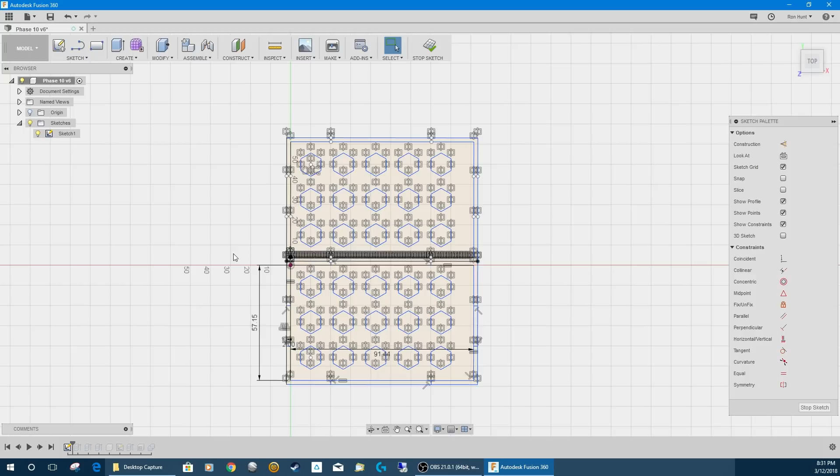For whatever reason, I think that was causing tons of issues, and everything gets going really slow. But anyways, we'll run through it real quick. I made the inner box here, and then after that I did an offset of 2 millimeters to give me the outer part of the box.

At that point I ended up putting little cuts in at 10 millimeters, I think, on either side, and that was going to be my edges that hold the cards. After that I ended up mirroring, using the mirror command on the sketch here.

I used, where is it, mirror. You can't see it because I don't have anything selected, but mirror, when you're in sketch, allowed me to basically copy or highlight all of this and mirror everything on this center line, and it just flipped it all the way over. So it was 100% tied directly to whatever the measurements did on this side.

After that all I did was add this shape in here, and then once I added it, I did a rectangular pattern and adjusted it so it looked nice. And then I just mirrored that all over to the other side.

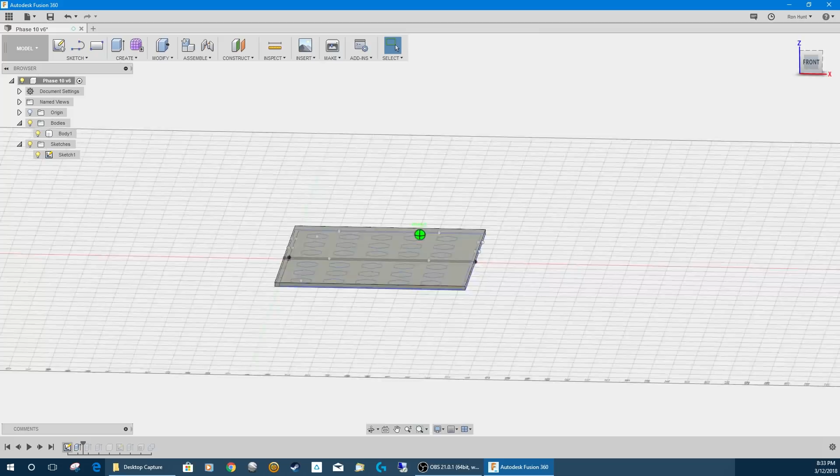At that point I came out of the sketch, and at that point I have my bodies. You can see the first thing I did was extrude the whole bottom up, 2 millimeters. Then the next thing I did was grab the edges, all those corner pieces, and extruded those up. Once I did that, I cut the holes and extruded those as cut.

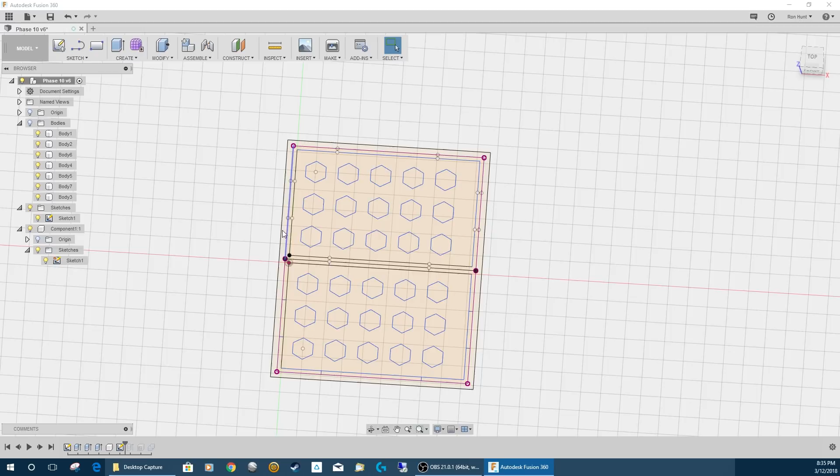So anyway, I did the exact same steps, where I ended up creating a box using the sketch on the inside. I projected the outside edge and projected that into the current drawing, into the sketch for my lid. Since that's now the inside, I did an offset of 3 millimeters because I wanted a 2 millimeter wall with a 1 millimeter gap all the way around.

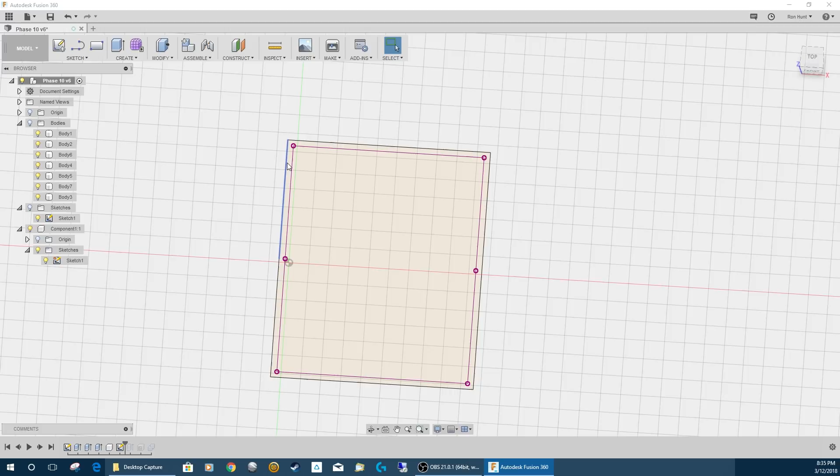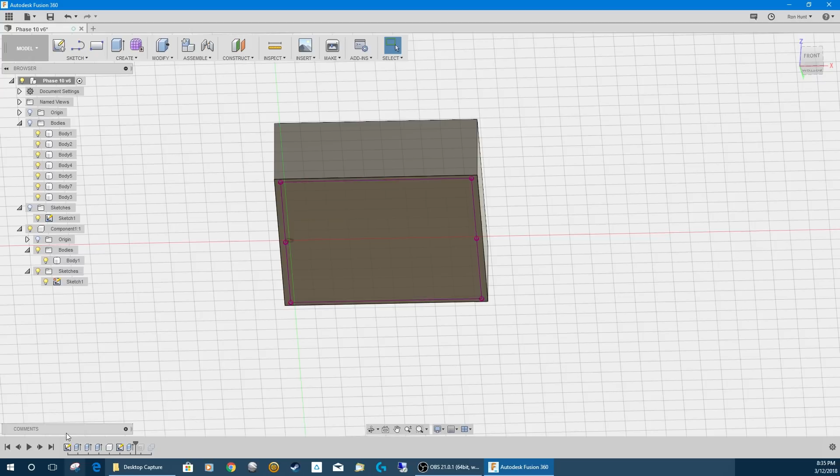I extruded that straight up as a big block, then rotated to look up from the bottom. After that, I did a shell, and once shelled, it went from being a full block to just a shell with 2 millimeter thickness, which allowed me to have a 1 millimeter gap around. At that point, I was done.

So that was how I did it, and it was pretty easy. It was neat using some of the little things I've been learning over the last year messing with Fusion 360, and it really is amazing. All the little tricks speed things up so much, but it's also funny how fast it can go bad. But that's what learning's about, and it's kind of fun. I'm sure there's things I did wrong that caused it all to blow up the way it did.

But whatever, it worked. Hopefully you got something out of this. Again, everything I printed today was Maker Geeks Crystal PLA in 2 different colors. Printed at 235 on the nozzle, 60 on the bed for the Mark III, and 50 degrees on the bed for the CR-10, because I'm a wimp and it's slow to heat up, so I kind of go warmer or cooler.

And again, I had issues with the Mark III, so now I've got a bad fan to go with all the other bad parts I've had on it. A little frustrating. Still love the printer, though. It prints great and fabulous when it prints. I'm pretty much about ready to do my review of it, my thoughts after 4 months.